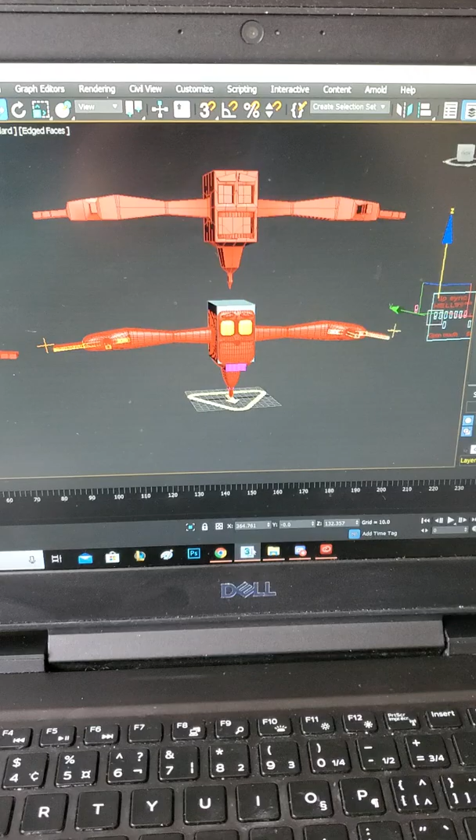Hello there. Here in my scene is my character. This is a character I create. I call him the Square Ghost. He's pretty simple, but what you see with the blocks are actually my CAT rig.

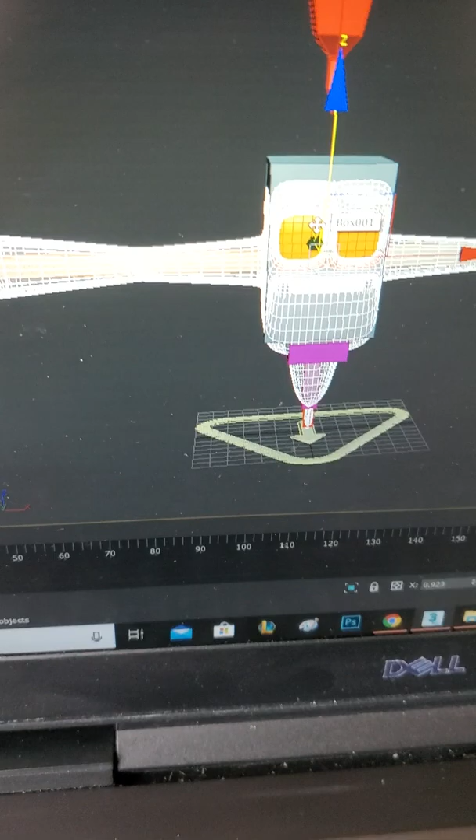I'll just put him in see-through mode. And then you can see that I've created arms that have 3 fingers for each, well 4 if you count the thumb, and I would count the thumb as one of the fingers. He actually even has the tail links, so if you wanted to move his tail, you can do that as well.

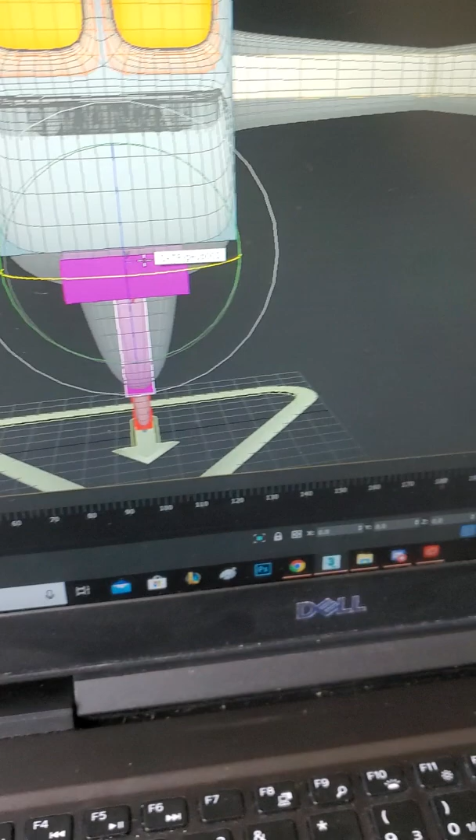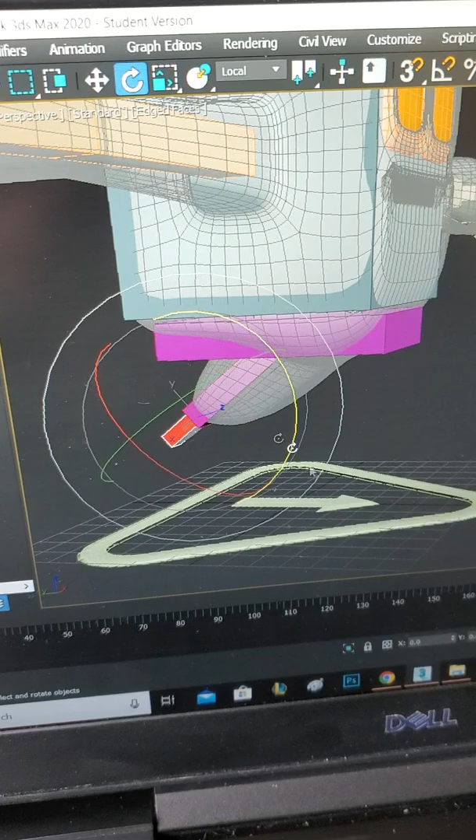And the character has been skinned as well, so you can see that the tail is skinned to him, and so is the smaller half of the tail, or wedge, I guess you would rather say. So the 2 wedges have been skinned.

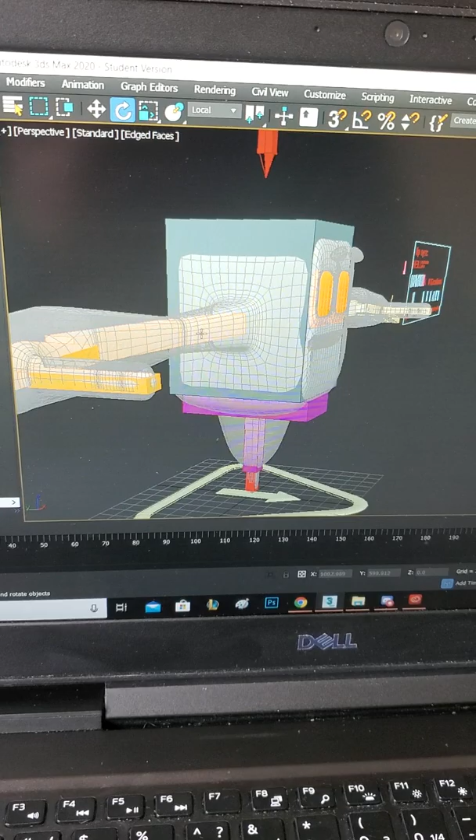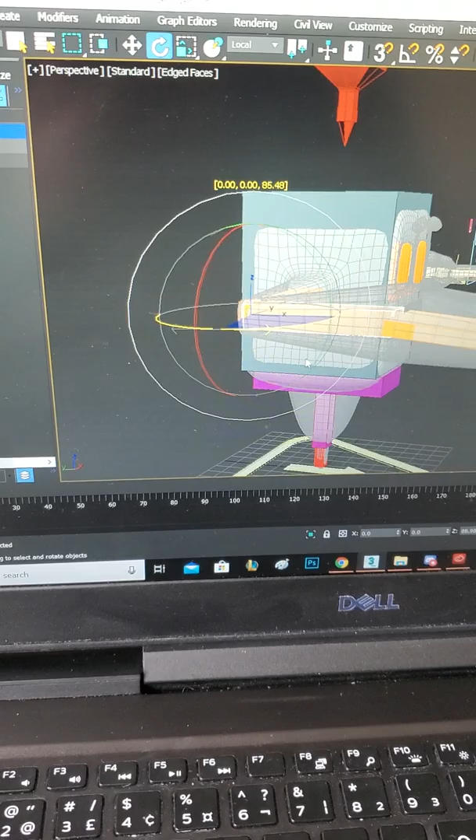If I freeze my character, you'll see that the arm is skinned to him as well, fully, and the elbow works just fine, and it doesn't ever break when it's moving.

And here, I'll just do this in see-through mode, freeze the character, this way so you can see the mesh.

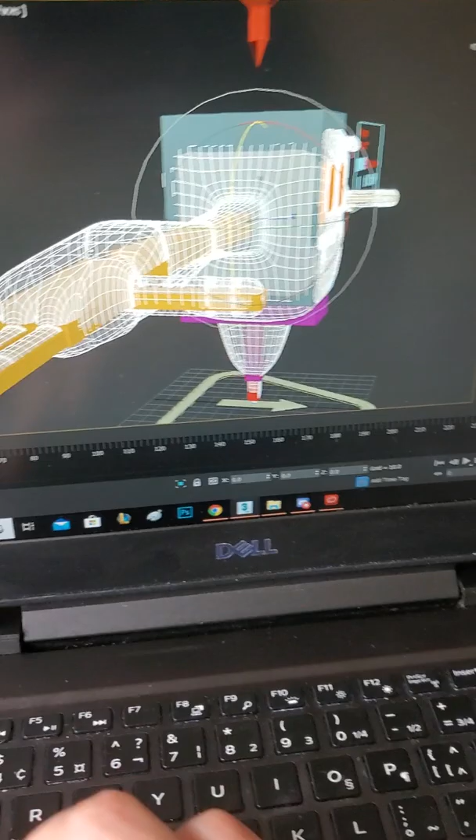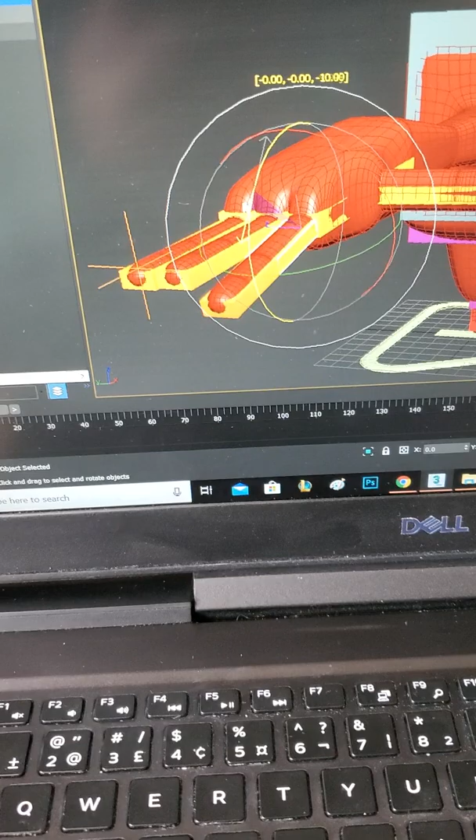And I've even skinned the fingers extremely well. It's very hard to balance 3 fingers to be skinned, because one will end up colliding with another, and then when you're dragging the main one down, it will start colliding with that other finger there.

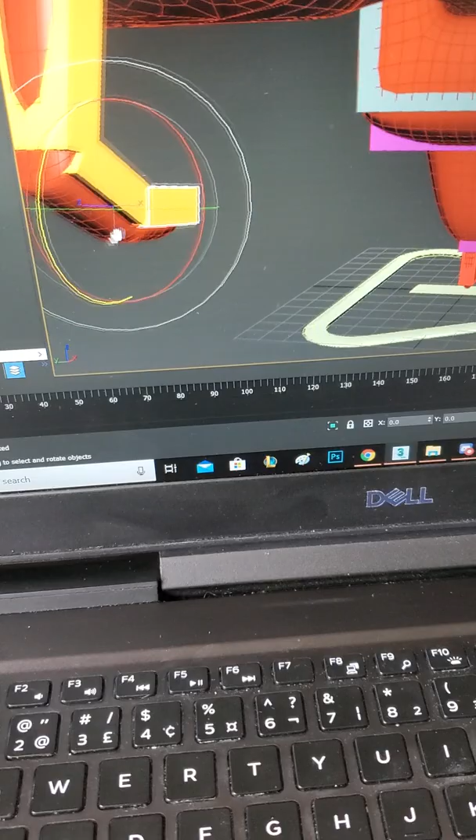But you can see that even the little blocks of his fingers are all skinned, so he's got 3 bones, just like a human has 3 bones, so they can do stuff like that, just like my guy.

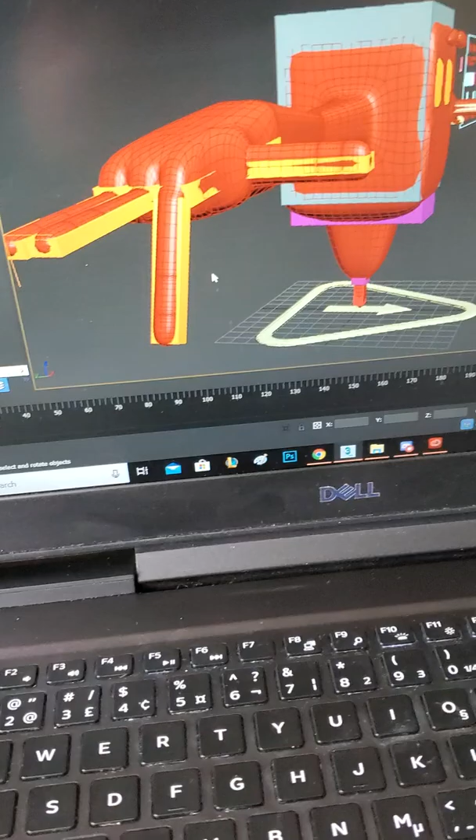Yeah, we'll just call him Square Ghost. It's kind of the name I've just given to him.

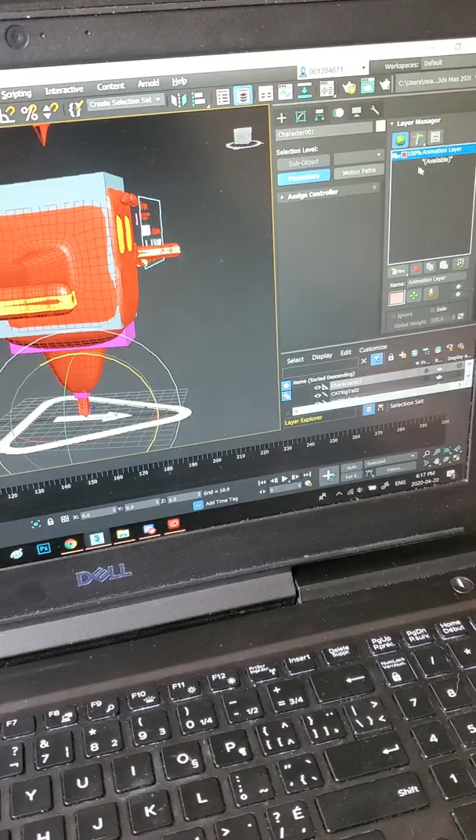I'm not even sure why I'm doing that. One sec. Because you can just go to the motion panel and then turn off that animation layer. And now his finger's back in that position I needed it in.

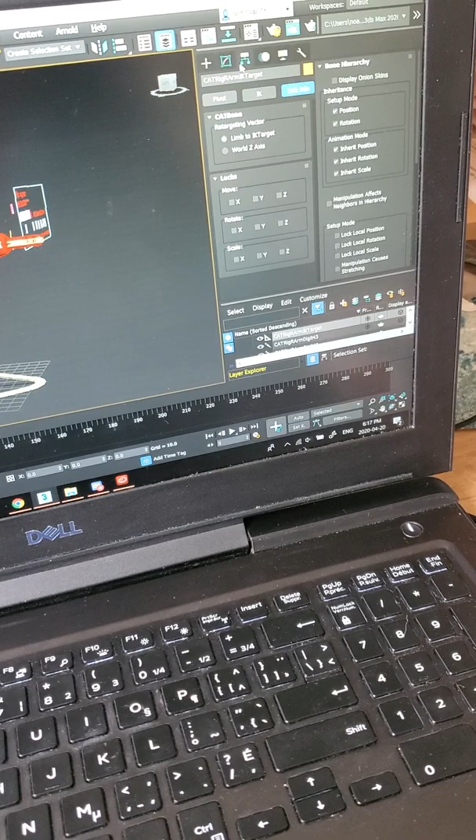But yeah, I've had the CAT targeting as well, so that when I move this CAT target, let's just put that on IK, not FK. Sure enough, the character's hand goes right to where the target is.

When I go to move, it can be controlled and manipulated by that.

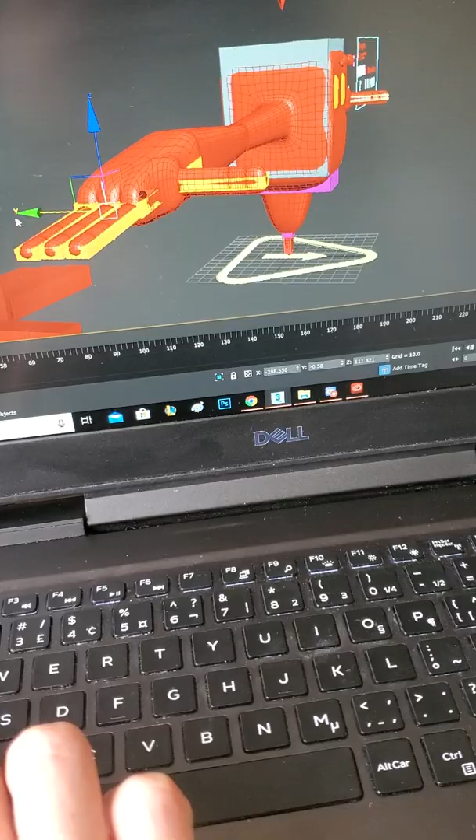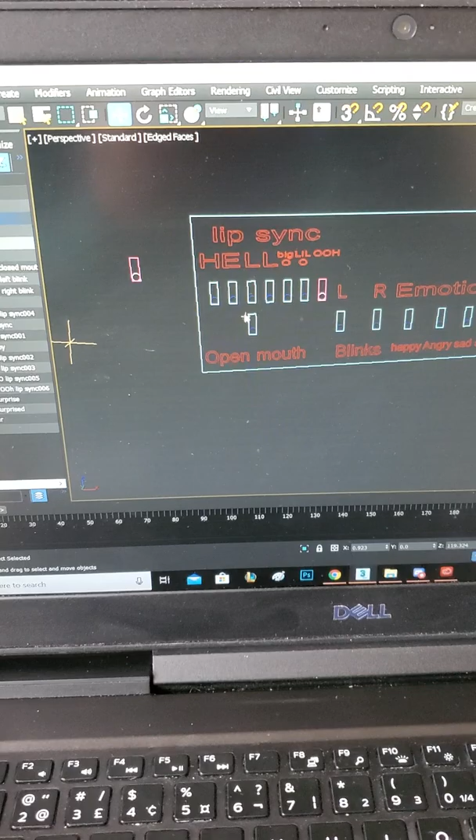Yeah, he's looking pretty good. I have assembled my own controller for him. It's actually a lot more complex than the one for the ball character, because the ball character didn't even have lip sync on his, but my character has actually some lip sync morph targets.

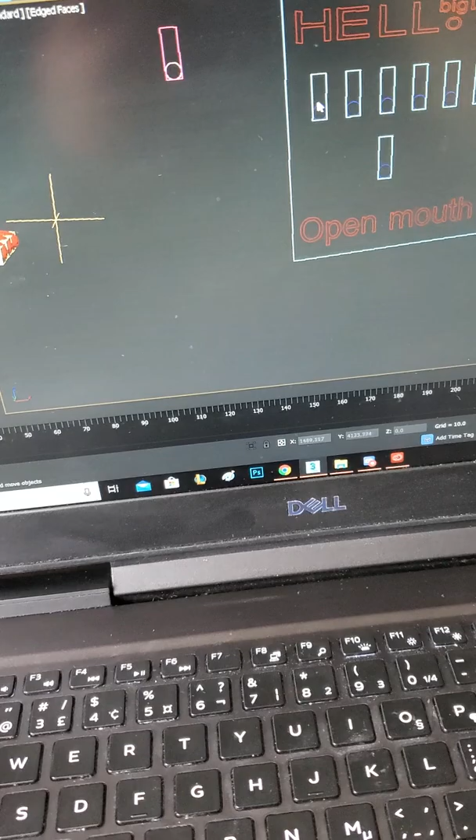There's a few of them. He's got like, basically he can just say hello to you, but it's something basically, you know. It's hard to control these when I'm doing this with one hand, so I apologize for that.

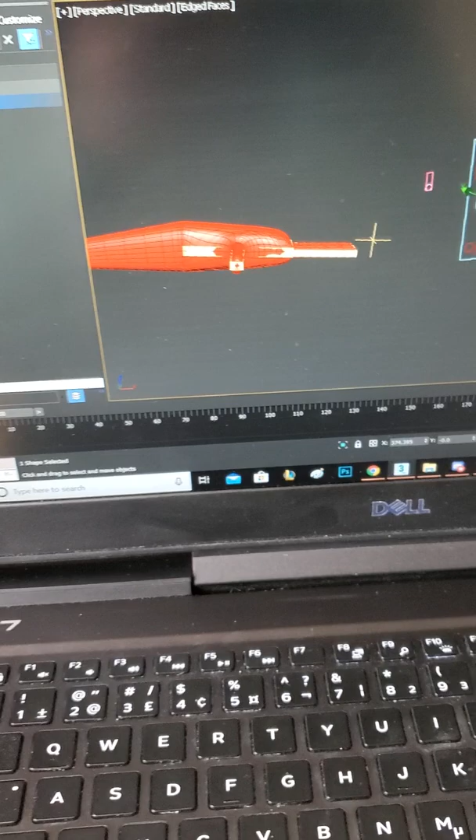See, like scrolling that, he's like, heh, heh. That's that, heh, for hello. And then there's a lot more than these little knobs here. This is the ah, or the eh, and hello.

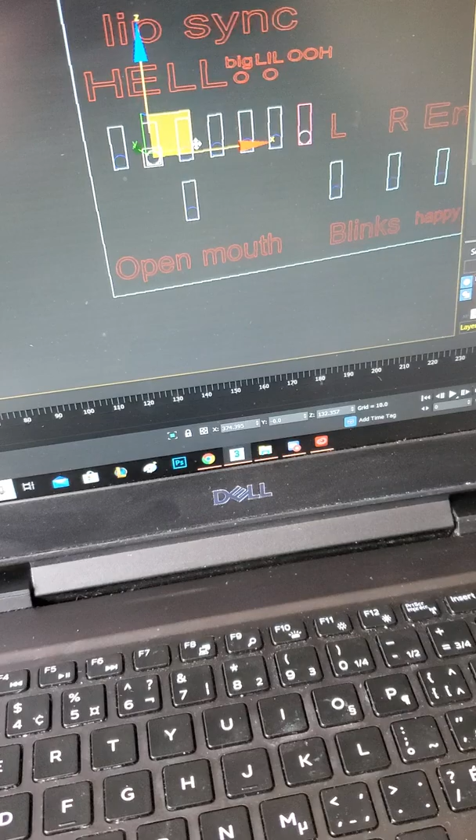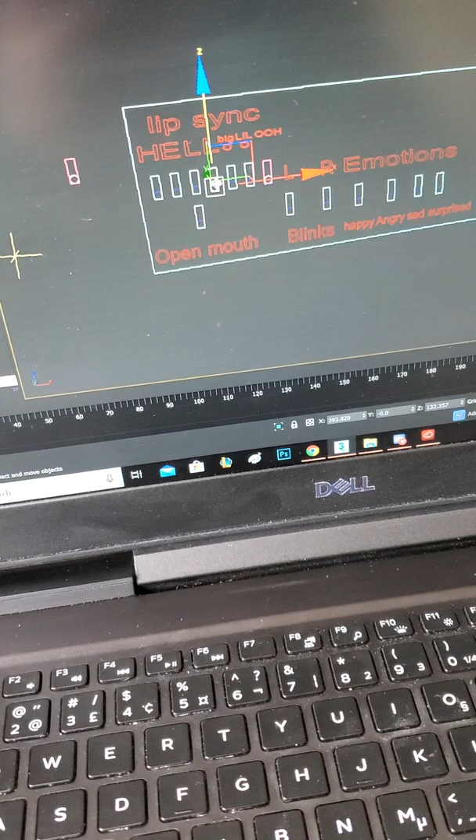These morphs get a lot better as they go up. I don't really have, the character does not have a tongue, so it was harder to do 'la', because a lot of the sound comes from you getting your tongue, but I made his upper lip kind of go towards where he's biting his upper lip rather than his tongue, because that's how you really get the 'la'. So you have to have the lip doing it, not the tongue.

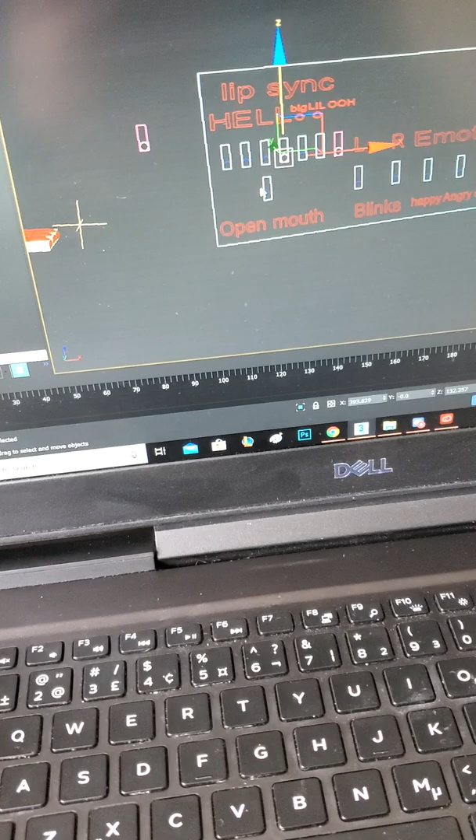And this is something I've just been developing. This character is over like the last few days.

It was a creative thing I wanted to do because I really liked it. I just had the idea. I don't know, I saw them kind of in my head because I know simple shapes pretty well. So that's kind of the big O.

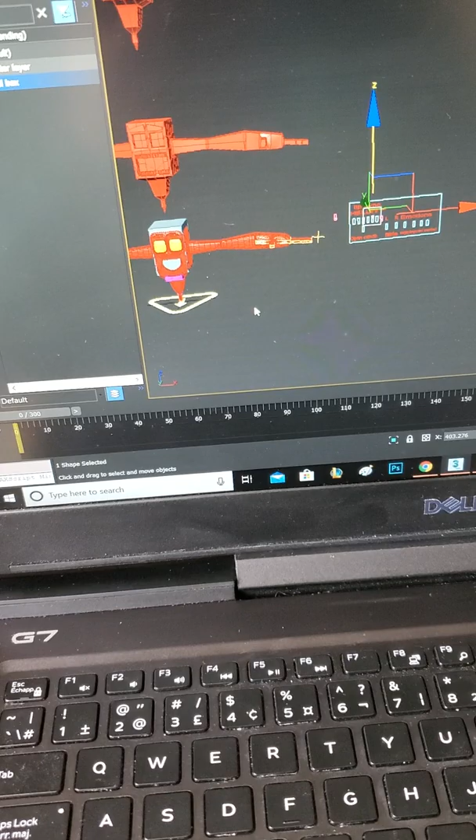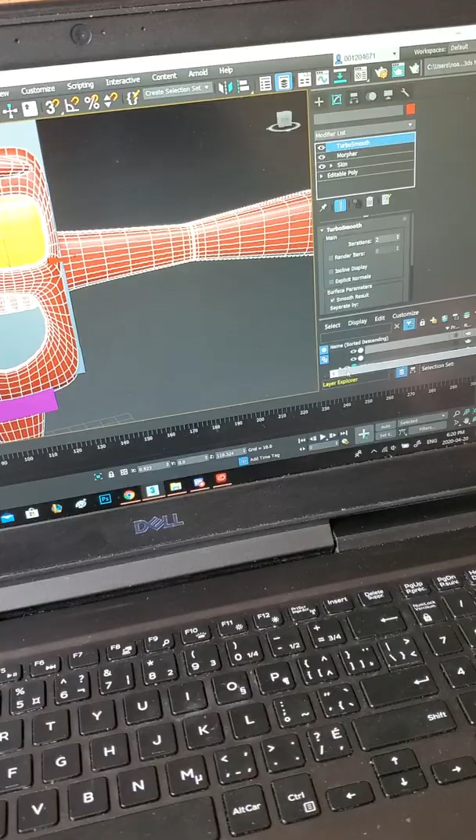See, but I'm still keeping good edge orientation. And I'll show you this with the CAT rig. So when I select my character, sure enough, the edges are all orientated well. I was just turning off my CAT rig so I could have that off.

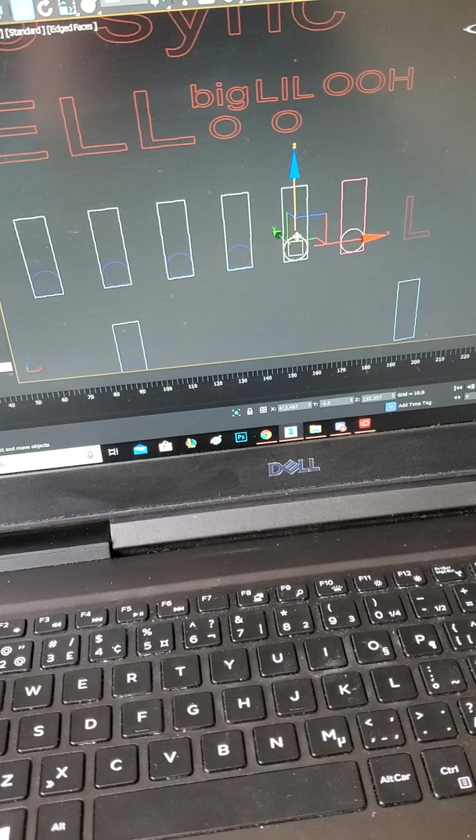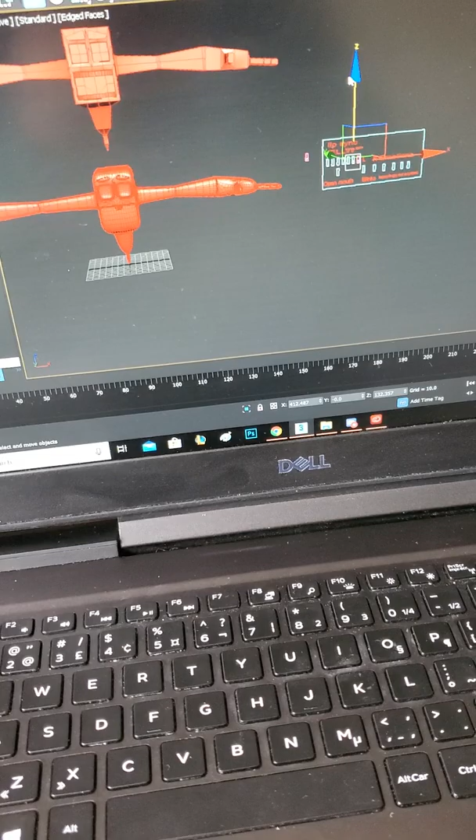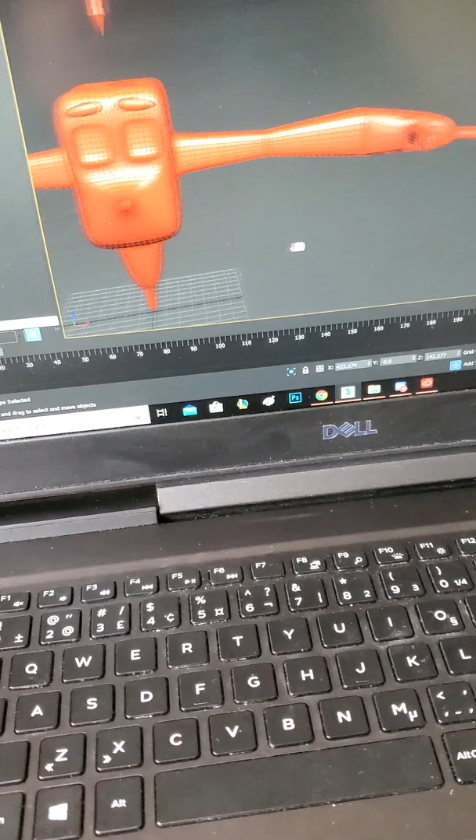That's lil O, if it will cooperate for me. There's our lil O. And this is all just a lip sync. I went pretty extensive on animating this guy's face before I rigged him up to the CAT rig. And that's that. Ooh. Actually, I don't see him out. Is that 100%? Yeah.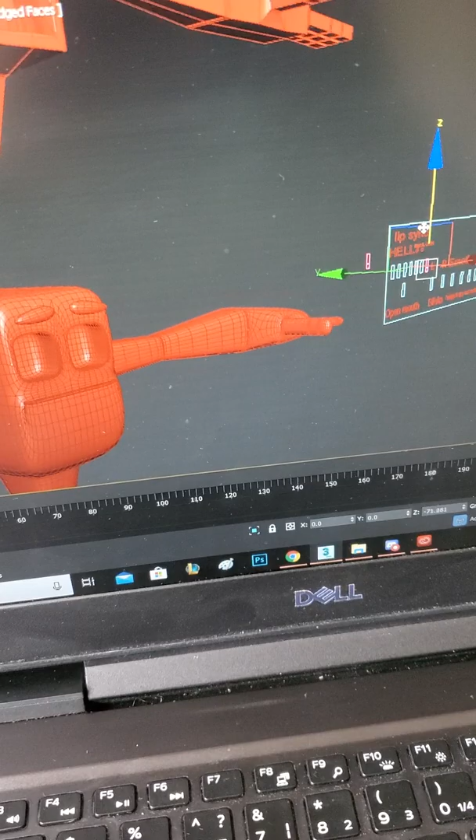So you can see that he's actually really reaching out his lip, just like a person would when they're going to ooh. Maybe, you know, if you're saying hello or just ooh in general is a helpful one to have, because he's just going ooh, ooh. Remember, I tried to do that same morph target on the ball man that I made this semester.

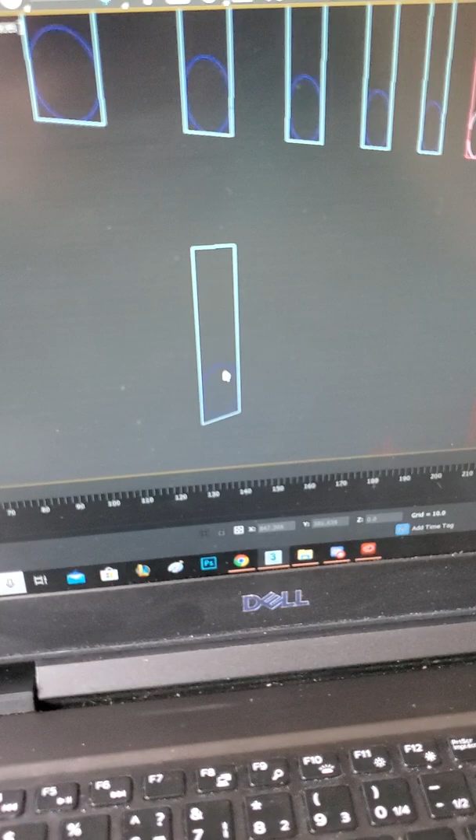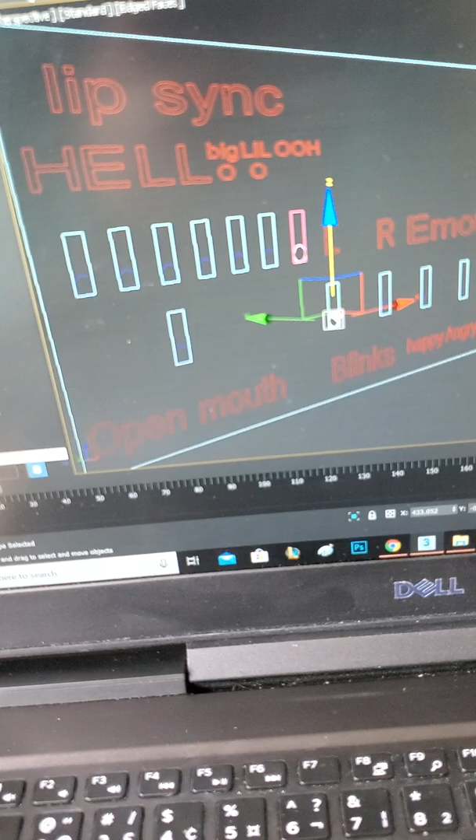Oh wait, I almost just moved that controller. Excuse me. Yep. I was just grabbing the controller box and not the handle. Always, if you have a controller, you gotta be very careful, obviously, with whether or not you're moving the controller box or the handle. So that's just him opening his mouth, because he started with his mouth open. But it's obviously closed now because the character needs to remain neutral to us.

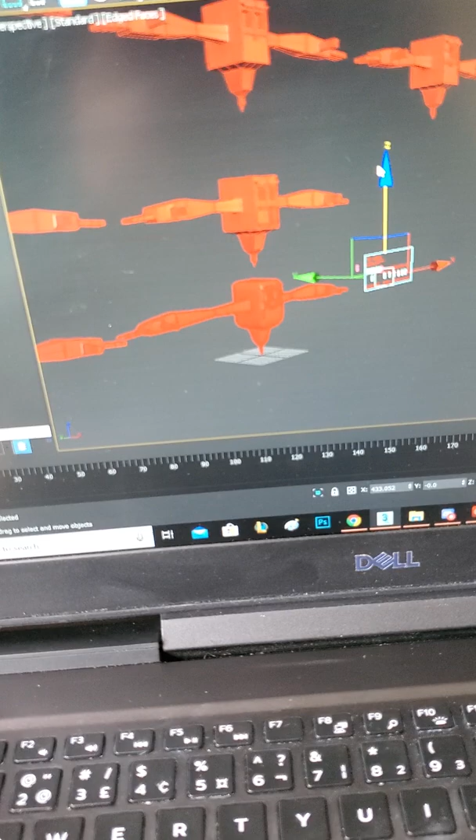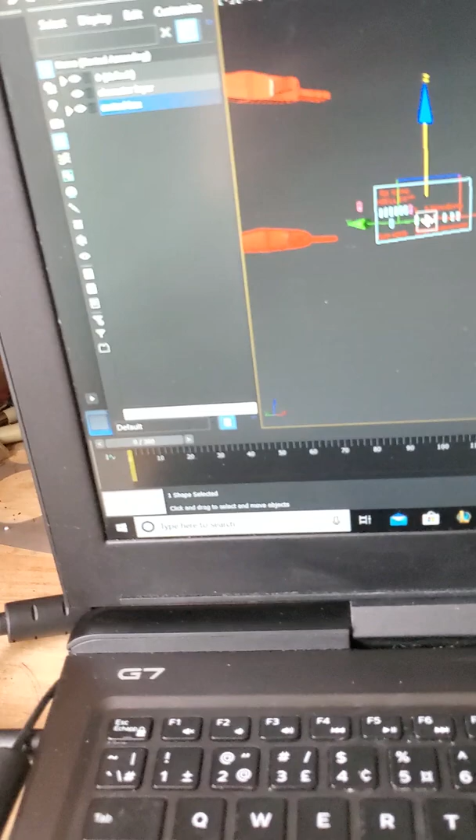I'll just scroll back on our blinks to see how those are working. Out. And sure enough, the character blinks and it looks proper. Sorry, one blink. And I'm going to animate this character in just a moment. I've already skinned him out of his head, so he's all ready to go. But the eye blink was made perfectly symmetrical as well.

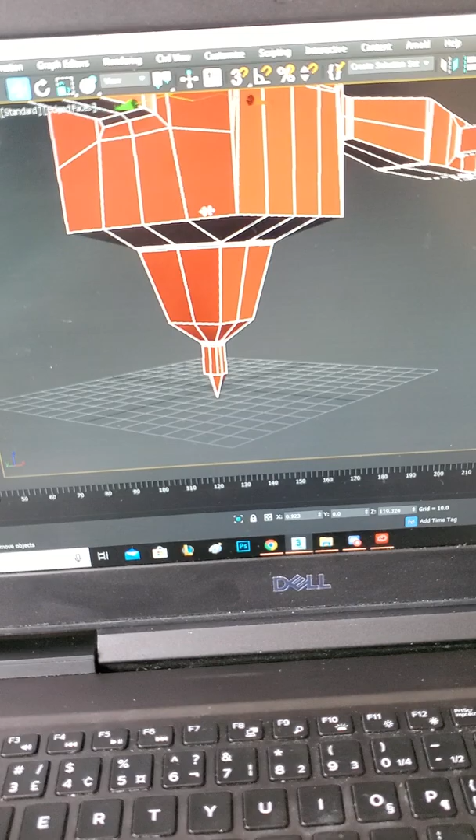This character's mesh is pretty simple in general. If I scroll onto my character and go to his editable poly layer, you'll see that he's really just a simple block that I had started out from, and then pulled the arms out from the center and the tail out, as well as where the pelvis is. Even though theoretically this character does not have a body, this is what's considered the bottom of the head, so it's considered the pelvis. And he has one wedge of his tail, and the other wedge.

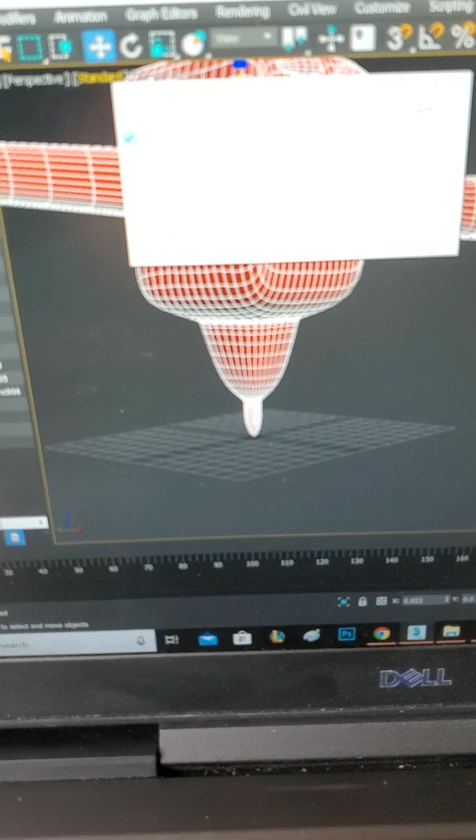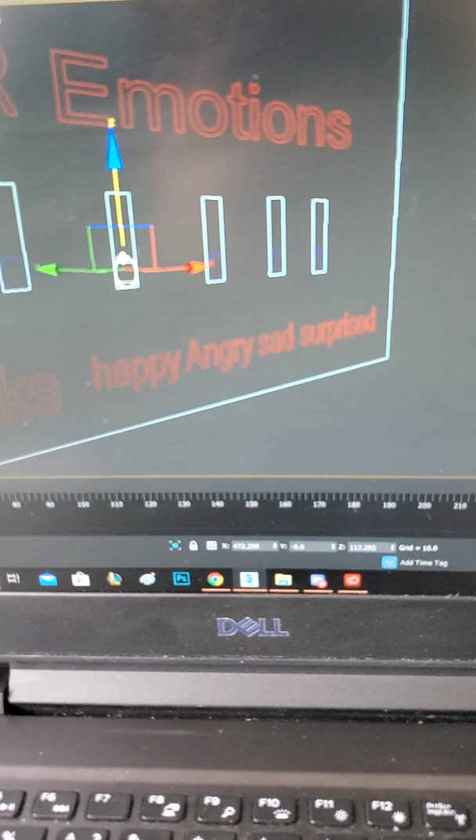So that when I show the end result, he looks very smooth. I'll even show with edged faces off. You can see that he looks very smooth and quite simple looking, but it sells it really well. So over here is our happy, angry, sad, and surprised morph targets. I'll start by showing the happy. See, when I scroll up on that bar, he raises his eyebrows and he gets really happy.

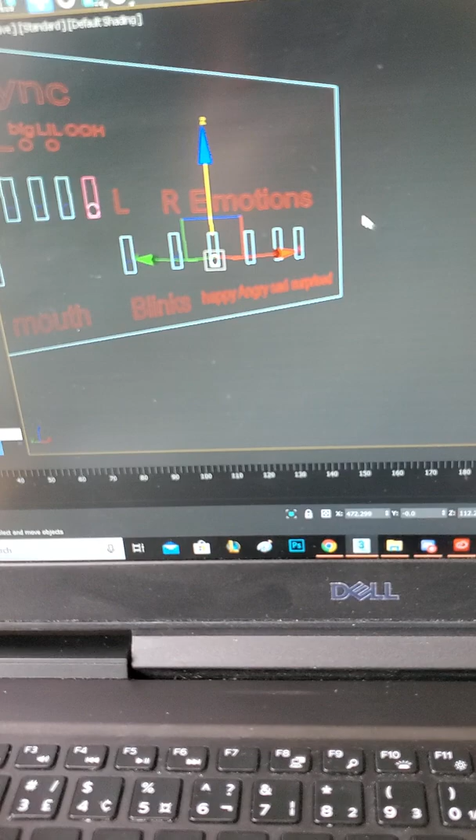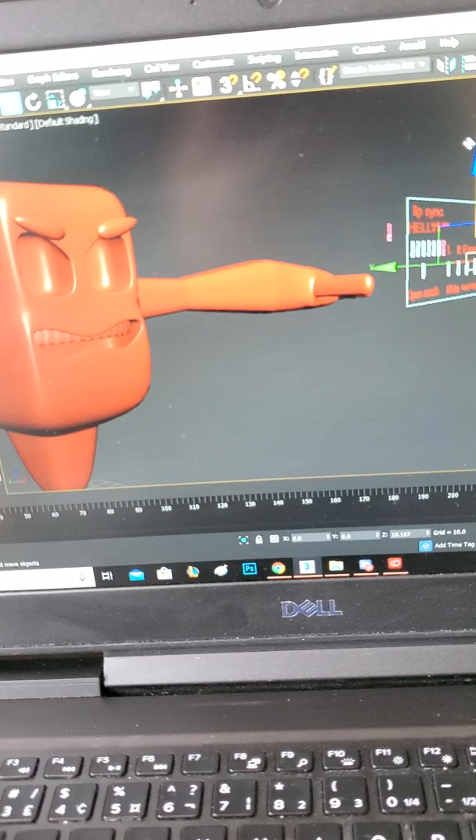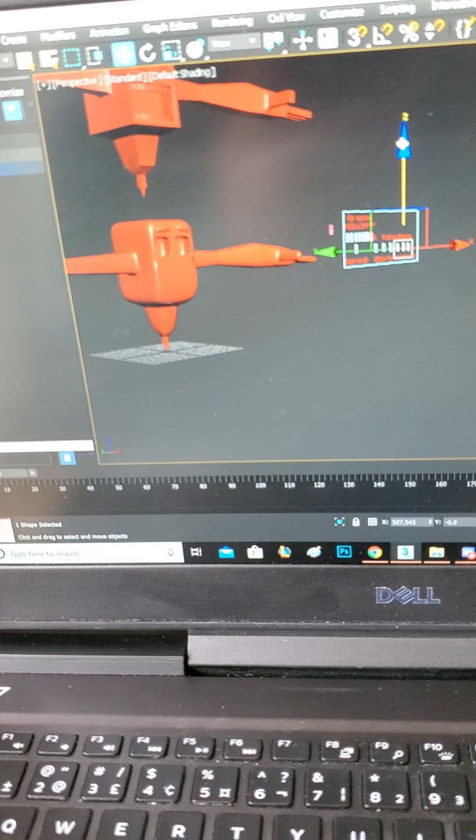I always try and push those morph targets pretty well so that the character is really showing that emotion. Here you can really tell he's angry because he's bringing down that whole brow of his head, so you see how he really gets angry. And then sad. Sad's a pretty funny one. I think I managed to do it pretty accurately. You can see this is what sad will look like for him. It looks pretty awesome. Oh, not such a good day for this guy.

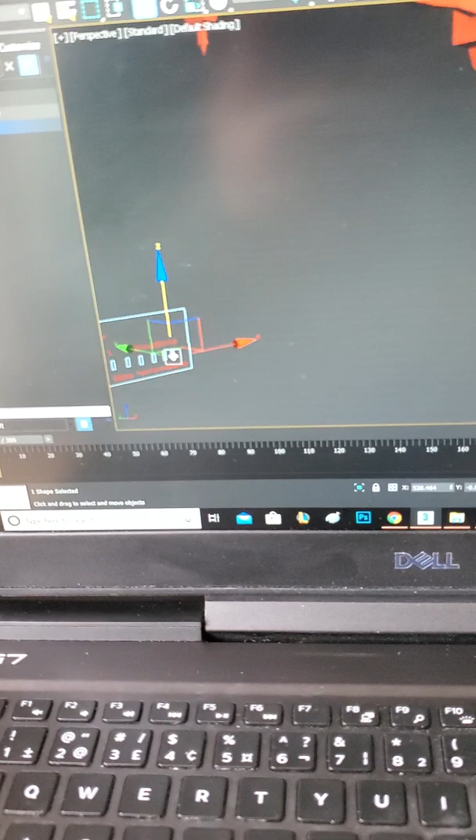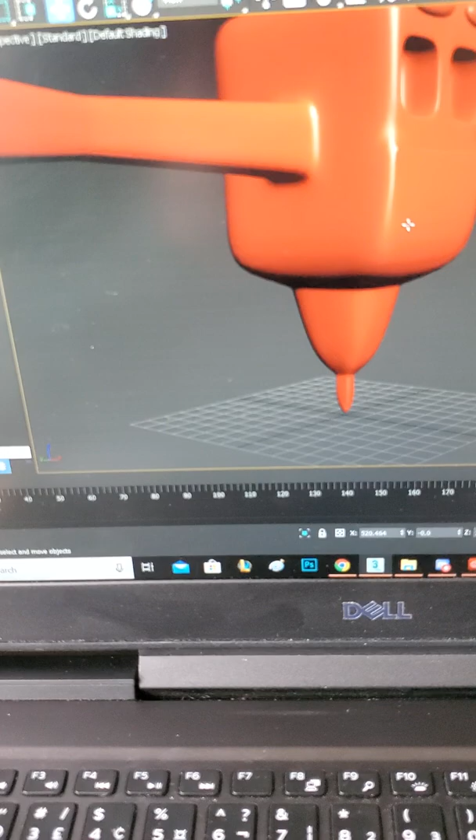This is my favorite one, him when he's surprised. It's quite an exaggerated surprise, but I think it sells it the most, his whole face is just kind of like, ah. I think it looks great though, because it really brings on that full jaw, makes him look dimensional. So this will kind of conclude my little review of looking at this guy.

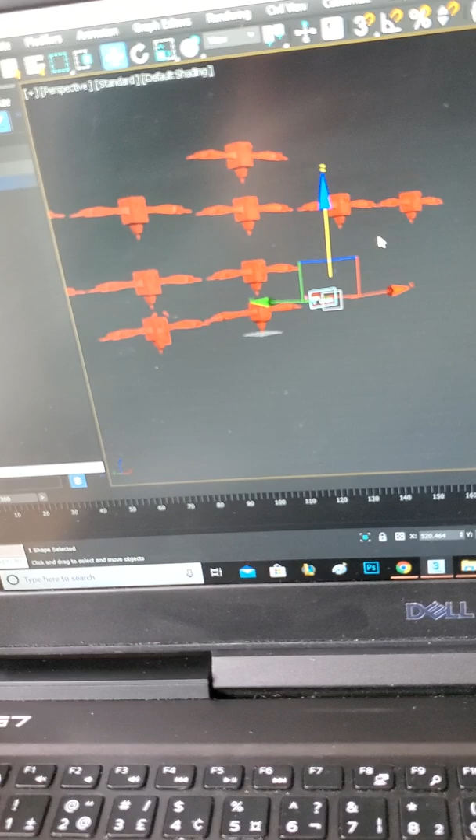I just thought this was something cool I've been working on that I wanted to show. This is actually all my morph targets in the scene. Those are all my lip sync ones for the hello, and all the ones I have so far for expression. I'm gonna start building out this section for the controller as well. I spent most of today on skinning this character. Yeah, it's a pretty cool little project I did for myself.